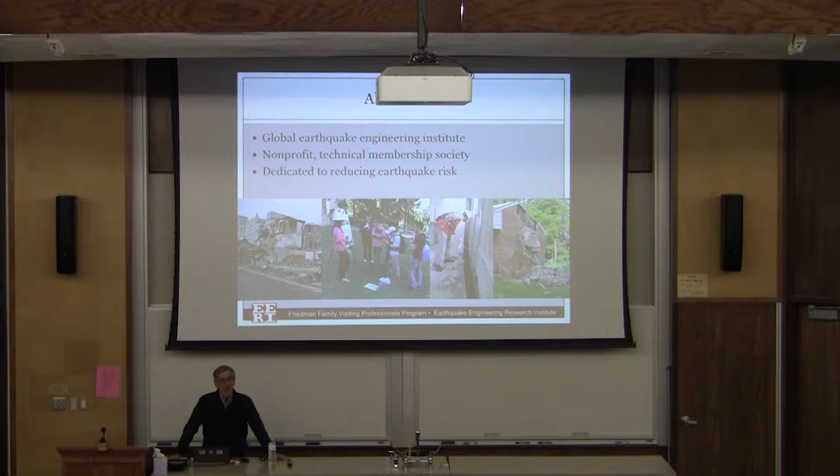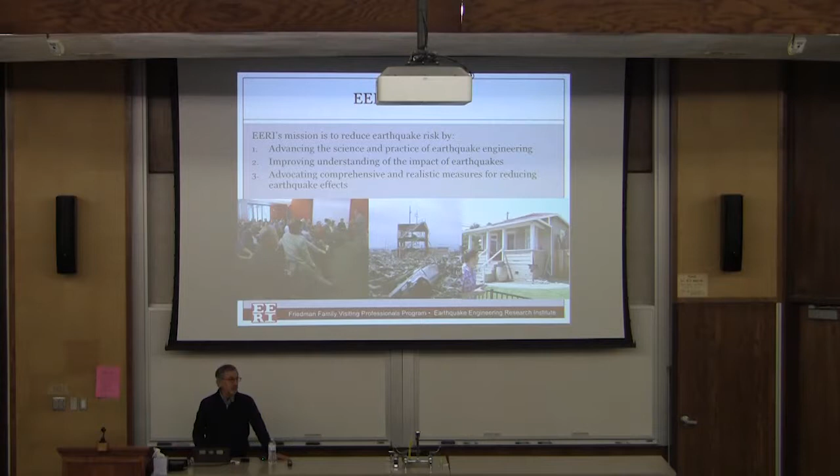I've had a 25-year involvement with EERI. It is a global earthquake engineering institute, a non-profit membership organization. I would highly recommend, even if structural and earthquakes is not your thing, there's something about this organization that is really quite extraordinary in its ability to mix its mission and its vision across interdisciplinary lines, including social science, around disaster, around resilience.

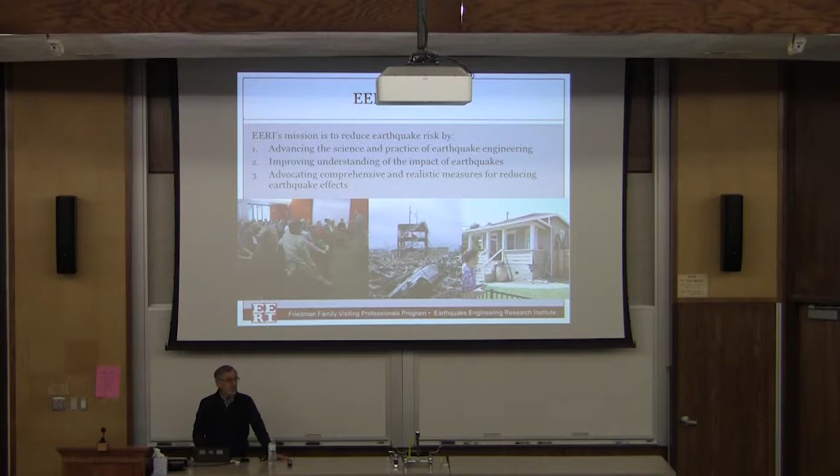So I highly recommend not only being involved in the student chapter, being involved in the regional chapter, and then once you're in practice, become a member. And there are quite a few benefits to being a member and inducements to going from a student member to a practicing member.

We have an extraordinary program in seismic safety in schools. We have a new program, Learning from Earthquakes, which is really our flagship program, and it has been expanded into on-site learning where students and young professionals get to travel to post-earthquake sites. It could be a year or two after an earthquake, but there's quite a bit of learning that can still be done from that travel study program.

So there are regional chapters. I understand you have a very strong Utah chapter. I'm not sure exactly where it's located, but it would be great for you to get involved in that. First year of membership is free, so I highly recommend you get involved in all sorts of professional associations, because there's nothing that gives you that kind of opportunity for leadership development, for exposure, and for the people that you will meet. That's how it charted my course.

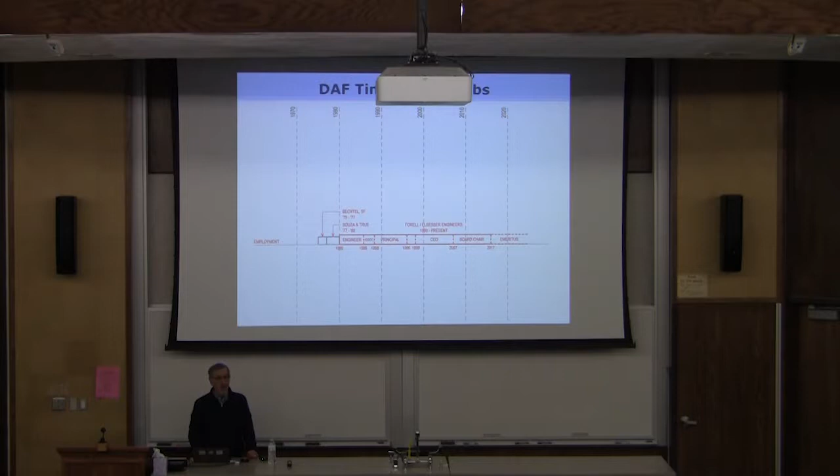So I've added a new slide to a series of slides in my presentation. This is my career timeline. I've had 3 jobs in my entire career: a 2-year job, a 3-year job which I liked much better and which made me decide I really liked consulting engineering, and then a 38-year job that is ongoing with Forell Elsesser Engineers, as my wife put it on my 35th anniversary there, was either you have a lot of stamina or you have no imagination.

So as I said, earthquakes have marked my career, so I added that to the timeline. It is remarkable how some of these earthquakes have either impacted me directly, impacted a project I worked on, or was a major influence in terms of code changes. There's a reason we chase earthquakes around the world, and chasing them with an interdisciplinary team is always the most interesting part of that.

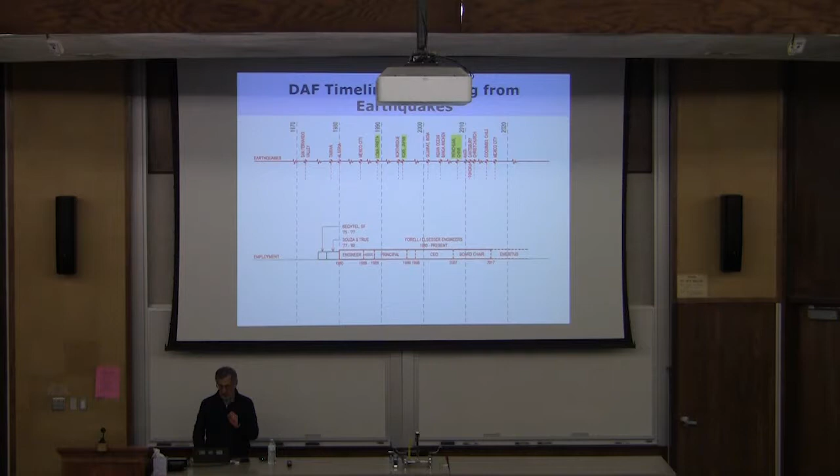1989, there was a little earthquake in San Francisco. And the bane of my existence now is people who say, my building made it through the big earthquake. 1906? No, 1989 - it was a tiny earthquake, and it really did not attest to things at all.

Northridge, 1994, was a really good example of about the code minimum. The code minimum with earthquakes doesn't always work. This was a code-complying building, except for one thing - it did not adhere to the provisions about diaphragm aspect ratio, so that just rolled over because of displacement.

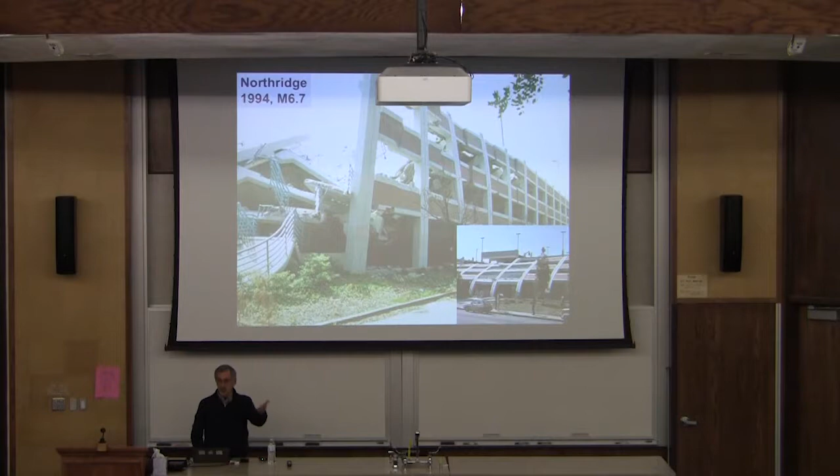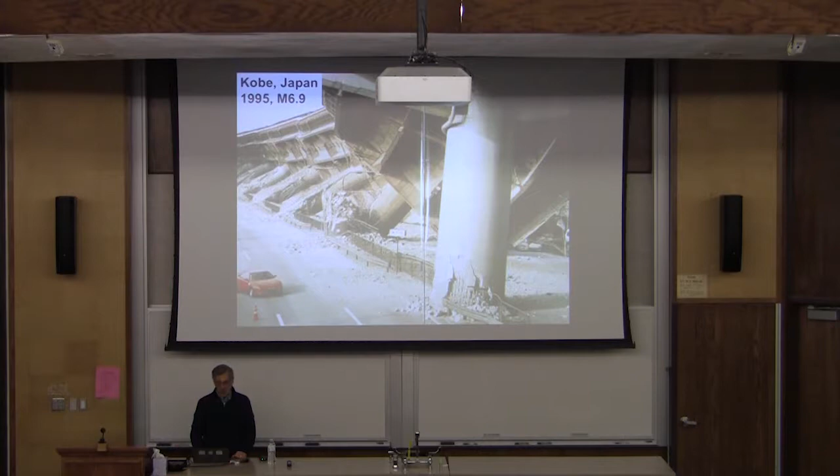1995, I was on the post-earthquake reconnaissance trip to Kobe, Japan. For me, that was a huge eye-opener, because what it taught me—this was an Embarcadero type freeway viaduct structure—is the brute force approach to seismic design. The larger you make it, the heavier it is, the more seismic force it will attract.

Banda Aceh opened our eyes about tsunamis. Wenchuan, China, this was very important in my career because I met someone influential in my life, Elizabeth Hausler, who started a nonprofit called Build Change that does seismically safe housing in the developing world. So now at the end of my career, I can devote time to being on the board of organizations like this.

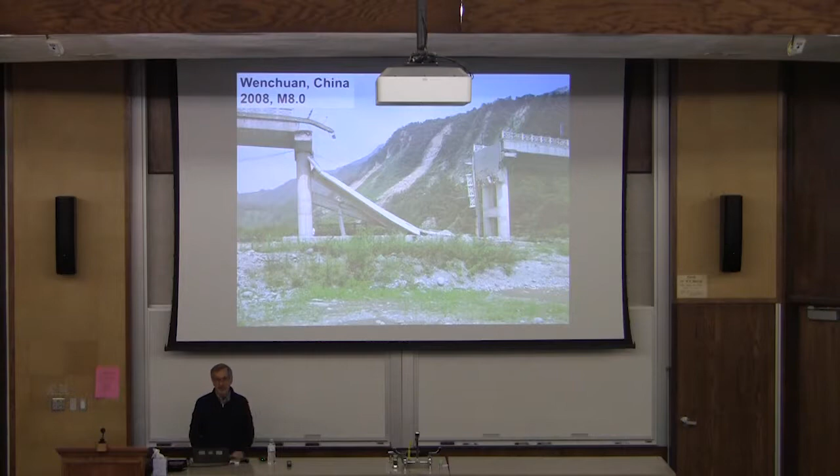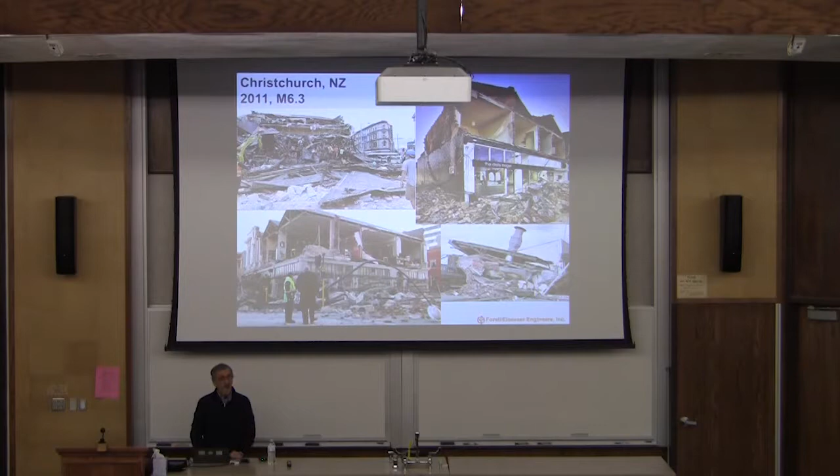Haiti just broke my heart. Being on that post-earthquake reconnaissance team, that country was destroyed by an earthquake and barely is recovering now. Christchurch was a modern earthquake with great building codes, great construction, and that central business district today is still destroyed by that earthquake. Tohoku, Japan, another tsunami.

Heard about the power plant, but what was important about this earthquake is not only do we measure Richter magnitude, the duration of ground motion means a lot in terms of a building's response. The Tohoku, Japan earthquake lasted 2.5 minutes of strong ground motion. So it was really interesting.

So, structural engineering—here's my favorite definition of structural engineering: Structural engineering is the art of molding materials we do not entirely understand into shapes we cannot precisely analyze, so as to withstand forces we cannot really assess, in such a way that the community at large has no reason to suspect the extent of our ignorance.

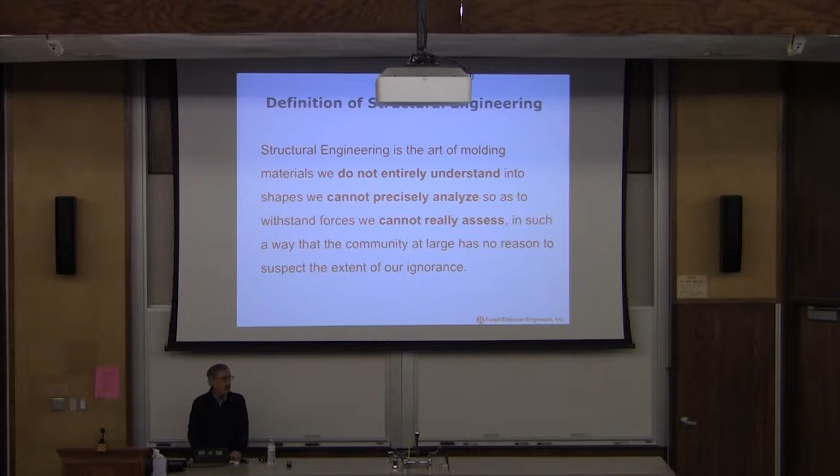Unfortunately, it's entirely true. There's a lot we can do, but at some point you have to use a lot of judgment in what you're doing. So I'm going to pontificate for a few minutes about what I've learned and some lessons learned.

The building code—we change the building code as we learn things over time. The building code, when I started practicing with respect to earthquake, was about 11 pages. Today, it's 3/4 of an inch. I'm not sure it's all that much better. It certainly is more detailed, but we've learned a lot of things from chasing earthquakes around the world.

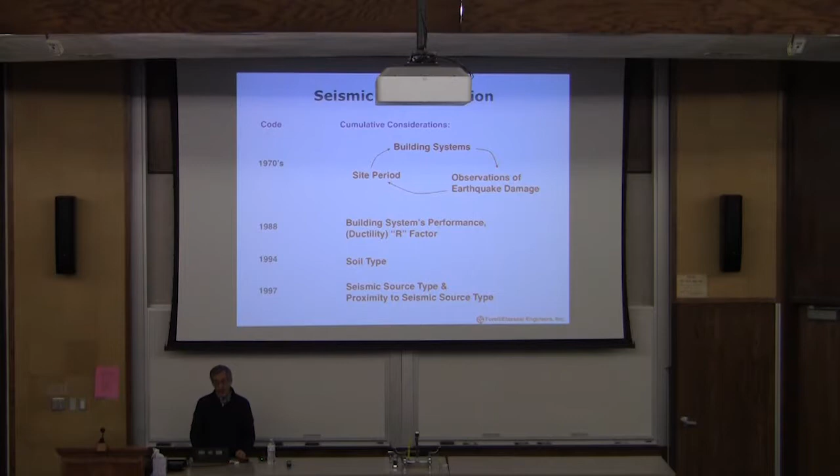But the code is still a life safety code. What does that mean? It means that you design the building to safely get out. It says nothing about your ability to get back in. In fact, it can be a complete economic loss. That is the basis of our building code. And I've come to believe that that is really not sufficient when we know we can do better.

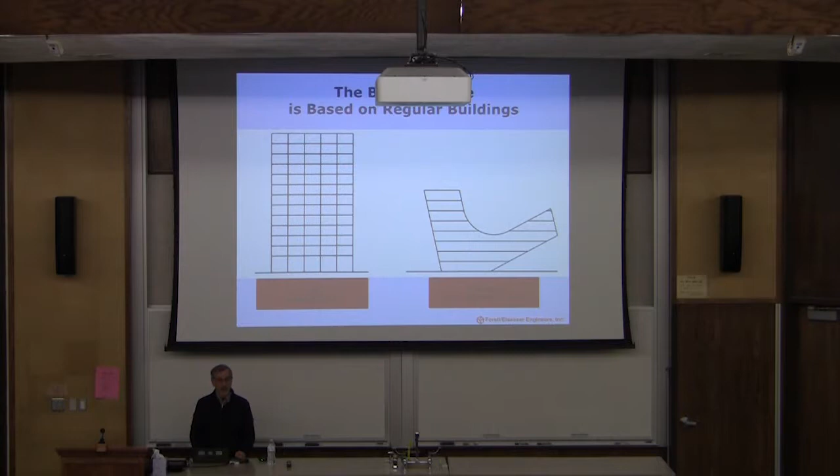The codes are based upon regular buildings, not really based for irregular buildings like the one shown on the right. Again, the building code is based upon life safety.

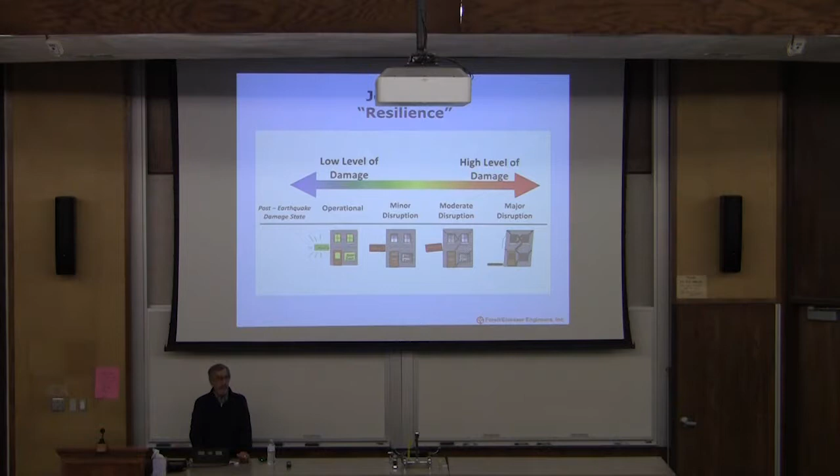A colleague of mine made this diagram of Joe's bar, because everyone can relate to a bar. On the right side of the slide are buildings that will be highly damaged in an earthquake—those are actually the code compliant buildings. What I'm trying to do these days is advocate for lower levels of damage, operational buildings, buildings that can be repaired in short time with a short amount of repair. That's what I call seismically sustainable buildings. And there is a whole movement afoot to do more in the way of seismic resilience.

A large part of what you do in practice is the documentation. You're putting together a set of drawings, plans, specifications, details. When I started, I used to do hand-done drawings in pencil. Today, it's all done by AutoCAD. I don't even know how to draw a straight line in AutoCAD, but everyone today does seem to know how to do that.

But the importance of documents is critical because a contractor is going to try and pick it apart. They're going to try and find the mistakes, and they're going to hammer the client because of that, and then the client's not so happy with you. So quality control of your documents is a very important thing.

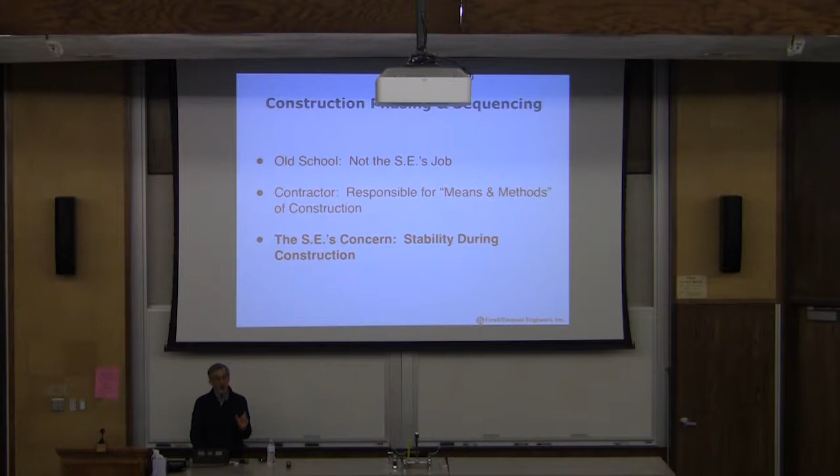I was taught early on that during the course of construction, the design engineer stays out—that's what the contractors are responsible for, called means and methods of construction. But so many of my early projects were retrofit projects where I cared a lot, because we were actually destabilizing the building until we were able to make it stronger. So a lot of our work does tend to pay attention to the stability during construction.

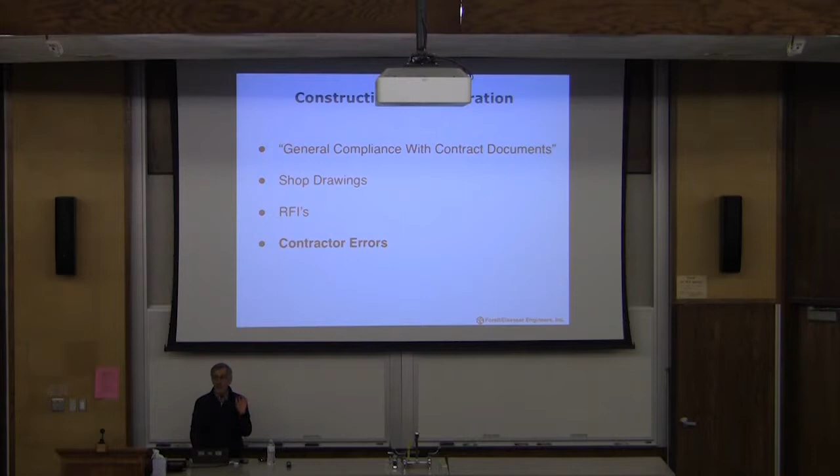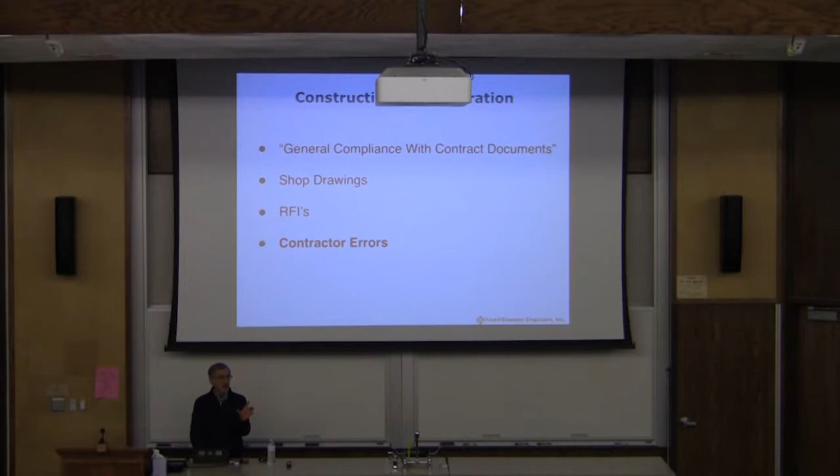Construction administration is an important part. After you design the building, put the drawing together the best you possibly can, you turn it over to a contractor, you review shop drawings, which is your chance to look at the vendor drawings to make sure it's being interpreted well. But contractors still make mistakes. Like, you think those two joists were supposed to align? You think that column was supposed to be plumb?

You think this followed the typical detail of spacing and penetrations through the slab? No, it's kind of just caused a shear zipper through that.

So these kinds of things are dramatic, but this is why an engineer goes to the field periodically, not to provide special inspection, but to make sure the construction is happening in the way it was designed.

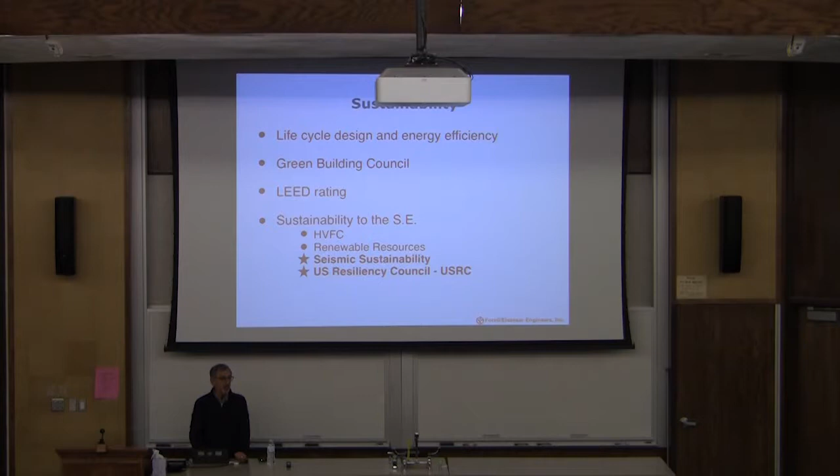Sustainability has become a new buzzword, but they kind of left out seismic sustainability. There is the U.S. Resiliency Council, a rating system for seismic performance, kind of like a LEED rating system. You've probably heard of that. This is trying to draw the public's attention to the safety of the buildings we live in, we work in, and pray in.

Communication is a really important part of the practice, written and oral. In fact, most engineers get the bad rap and stereotype that they don't know how to write, and to some degree it's true. But it is possible to write well and communicate well. What's hard for an engineer is communicating technical stuff to a lay audience, and you have to appreciate that, and sometimes intentionally dumb it down.

We've actually found ways of making movies, of diagramming things to help illustrate what it is we're trying to advance. So I'm going to talk to you about a couple of my projects.

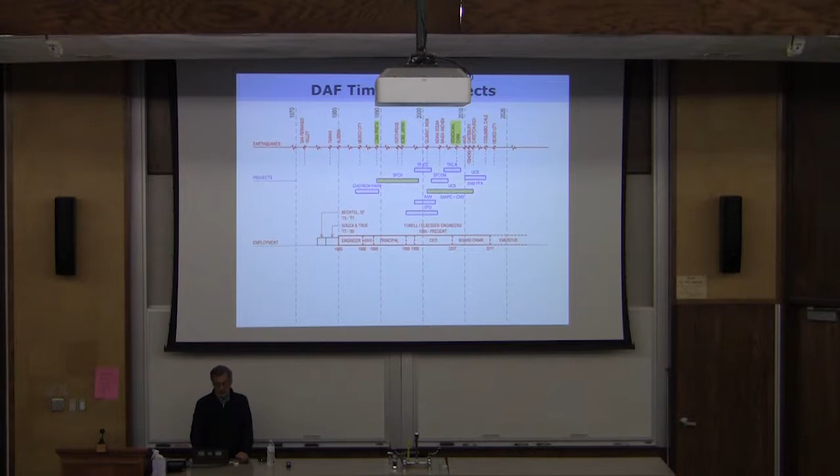On my timeline, I superimposed some of my projects, and the two highlighted are San Francisco City Hall and Memorial Stadium at University of California, Berkeley. You'll notice the decade-long time span of those projects. That's not typical, there were reasons behind it. They were unusual, one-of-a-kind projects, and so there was a lot of scrutiny.

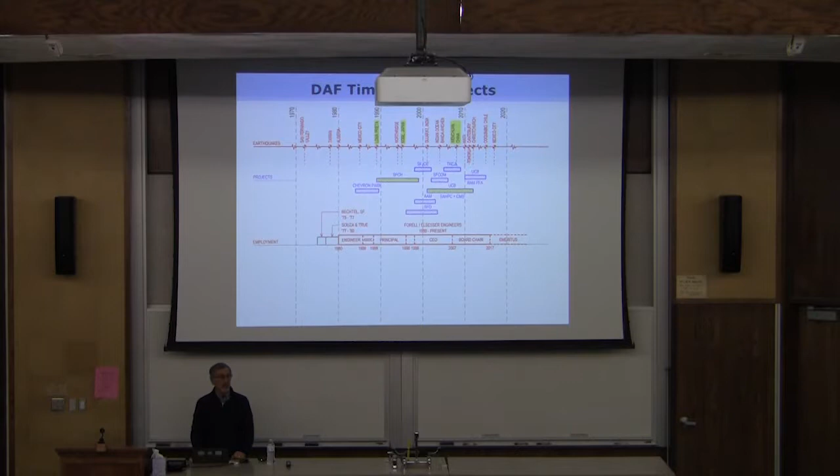On the Memorial Stadium project, there were 2 years of litigation to try and stop the project. I decided after spending 2 years with attorneys that I like architects much more than attorneys.

So how many of you have ever heard of base isolation? A few, that's good, because I thought I'd do a little primer on what base isolation is.

There are really 2 basic kinds of base isolators. There's an elastomeric one, the top 2, which are layers of rubber, high damping rubber, and steel, vulcanized together like a birthday cake, vertically very stiff and laterally flexible. The one on the right is another type of elastomeric bearing, but it has a center core plug of lead that adds to the damping characteristics.

A third kind is called friction pendulum. Today we use all of these almost interchangeably. The vendors for them, when we first started, were only proprietary vendors of each. Now it has opened up to be a much more competitive marketplace.

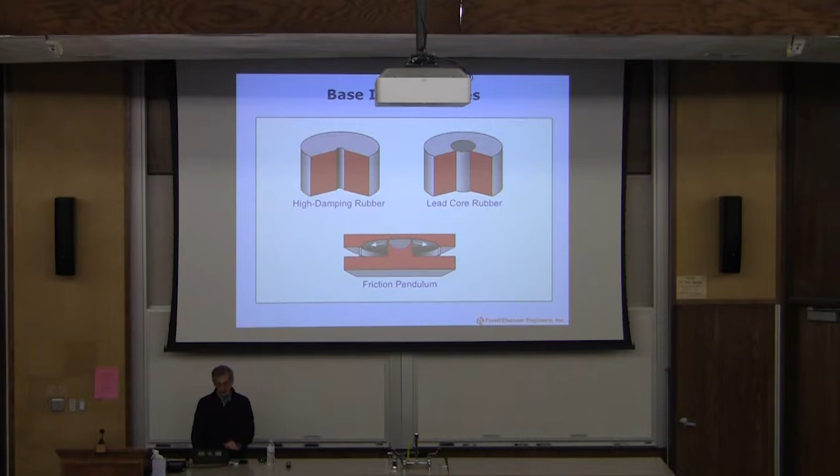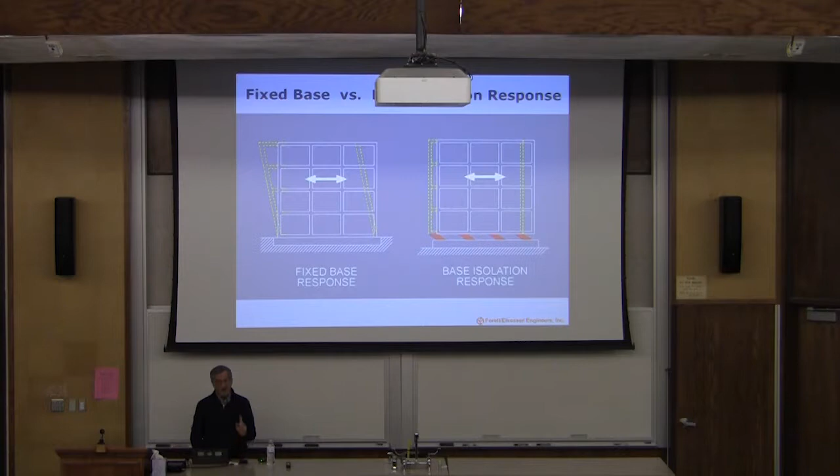But in a base isolated building, we soften the period of the building to somewhere between 2 seconds and 3 seconds.

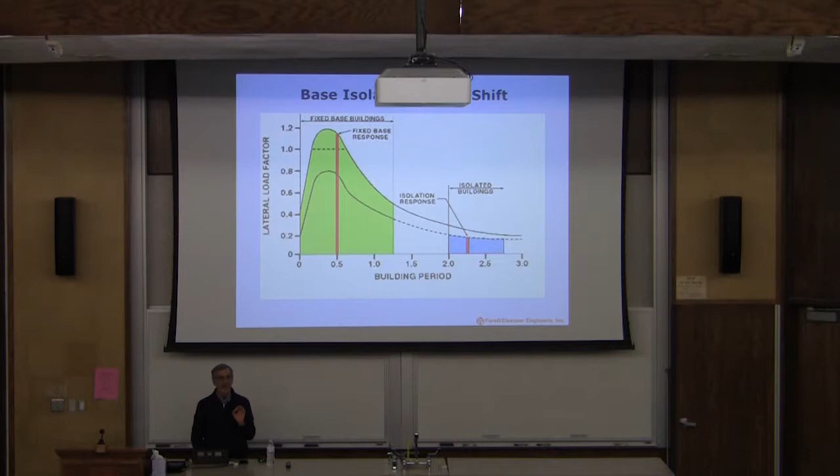And if you read back over to the acceleration, it's like 0.2 G. So we get almost a 500% reduction in the lateral force that we're designing for.

During the course of my career, we've been involved in all of these base isolation projects, most of them retrofits at the beginning. It's a lot easier to do for a new building. The very first building that we did was the City and County Building in Salt Lake City. They were the first ones who said, yes, we'll try this. And more recently we also did the Utah State Capitol building, which is also base isolated.

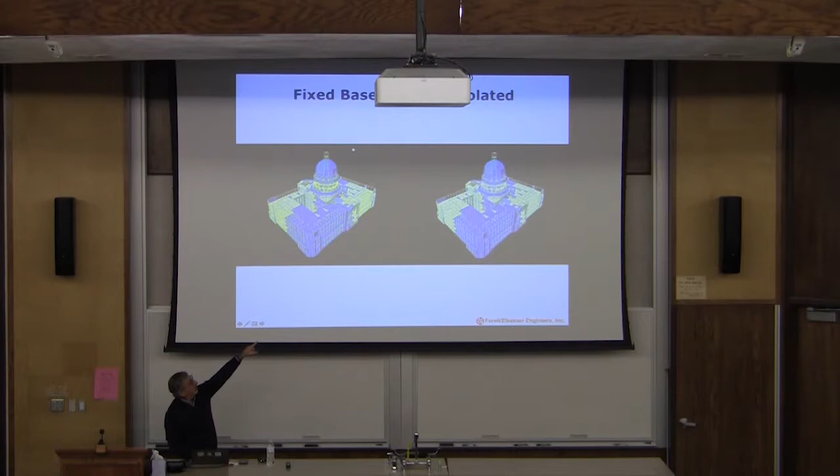Now, to demonstrate to the clients—I hope this works. So what you're seeing on the left is the fixed base building, on the right is the base isolated building. This is a real-time history earthquake response. Look how much the dome is moving on the left, how it's distorting. But under the base isolation, you can see those spring constants mimicking the isolators, and you can see how little the dome is moving.

Do you know, has this been magnified at all? Absolutely, yeah, for your viewing pleasure. Yes, it has, but it is symbolic of the stresses that the building is undergoing. It was long after we were under construction that we had the technology and the ability to show this to the client, but this kind of animation explains the value of this in one shot.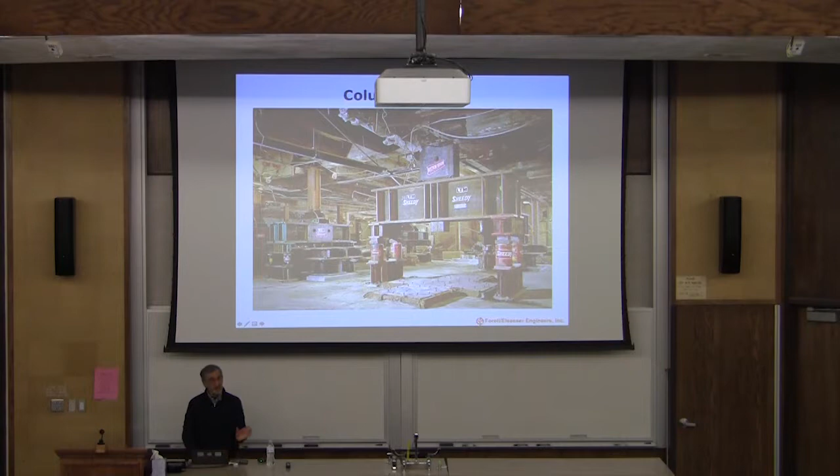And then on the left side you can see where the isolator has been slid in, and there's a steel cruciform on top that's going to be part of the future floor. In some cases, because of column weight and load, we had two isolators underneath, and you can see there are some plates around that. We locked the isolators down because until we installed all 468 isolators, it wasn't ready to be released.

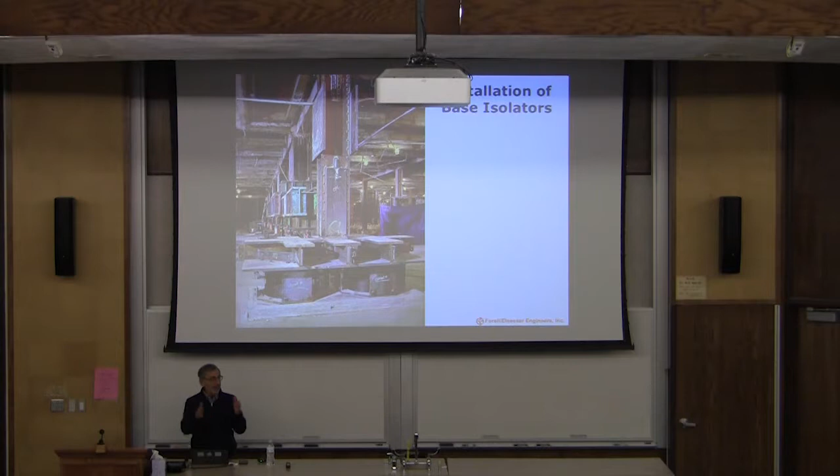In fact, we had to do the rest of the stiffening through that. There were 4 or 5 column towers that support the dome, and this took an extraordinary bit of bracing to support and do the load transfer there. And then this is a last shot of the new steel floor where you can see the seismic isolation plane below, where the isolators are residing. And then we put steel deck and concrete on top, so we had a nice stiff diaphragm to load all of the isolators more uniformly.

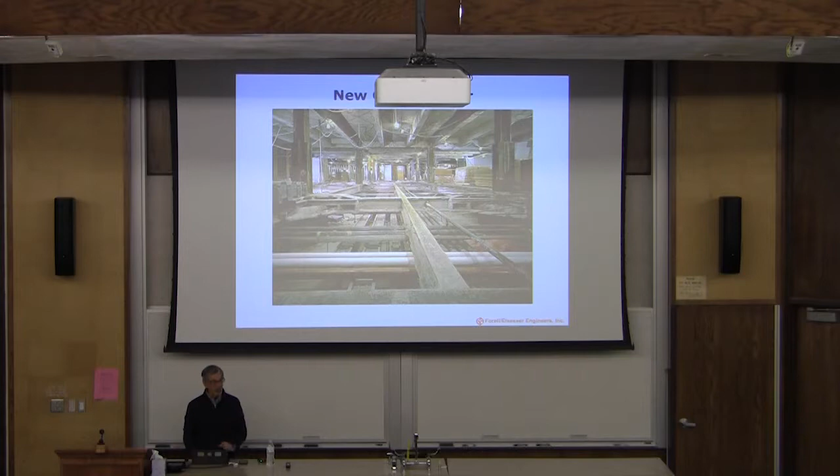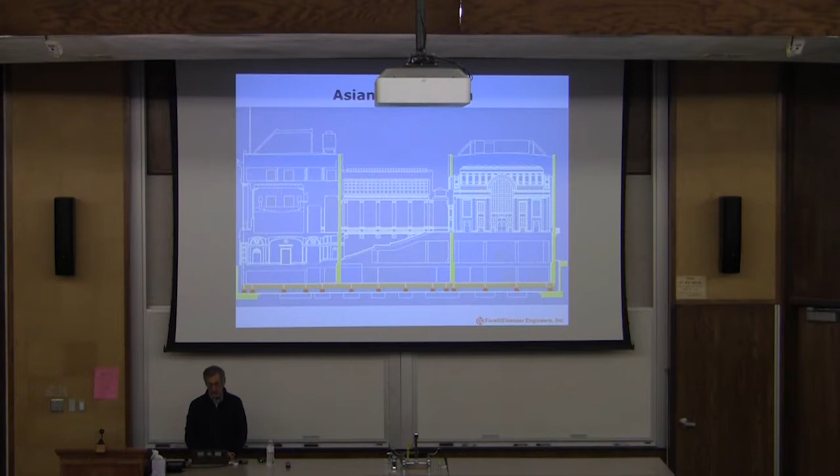As we were finishing up the construction of San Francisco City Hall, we competed for the Asian Art Museum project. It was designed by the same architect and the same engineer, same construction techniques. This was the old city library being converted into a museum, an Asian art museum, and it was essentially the same thing—we were creating a new isolation plane, stiffening parts of the superstructure. But in competing for the job, it was a historic building, and we kept saying we can do the same thing for this building, we can protect it. And the owner and the architect both turned to us and said, that's very nice.

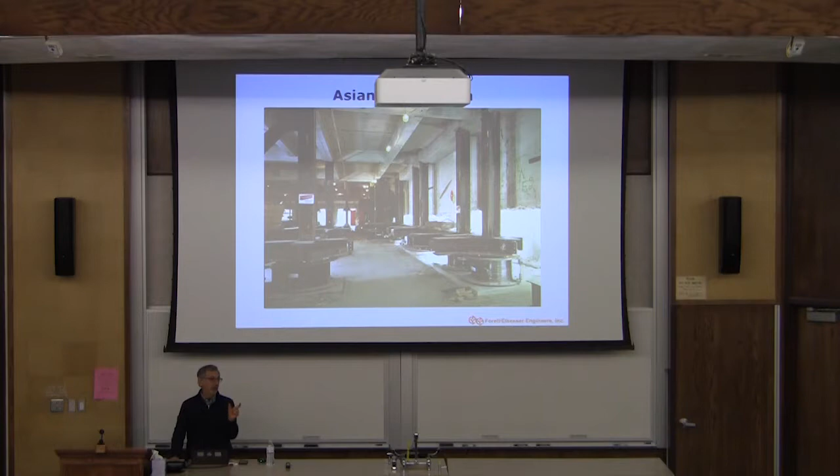We don't care about the building, we care about our collection. And the only way of preserving the collection and protecting it in an earthquake was to base isolate the building. So it was actually my first lesson on how base isolation and content and non-structural elements are about as important in earthquake engineering as the primary structure.

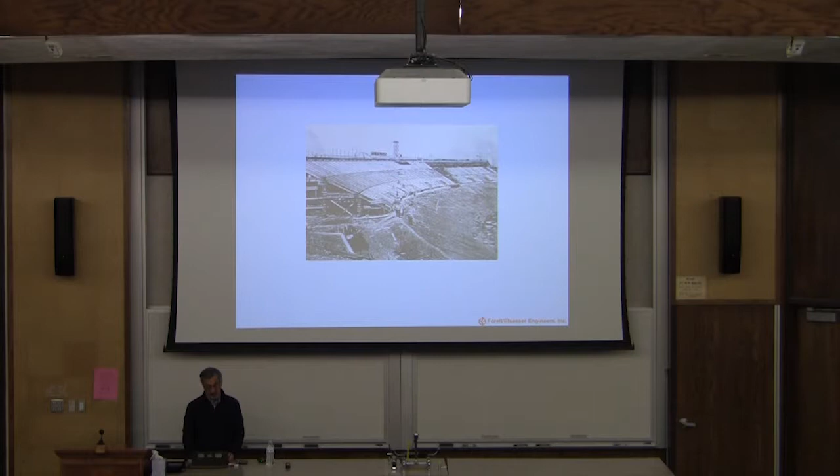It was carved out of a hillside, so one half of the stadium is just a slab on grade, so we had no concerns about that. I love seeing the mules doing the excavating in this. The stadium was built in 9 months for the cost of $1 million back in 1922. And I said that we spent 10 years in design and construction. This shows some of the scaffolding and shoring for the new West Bowl.

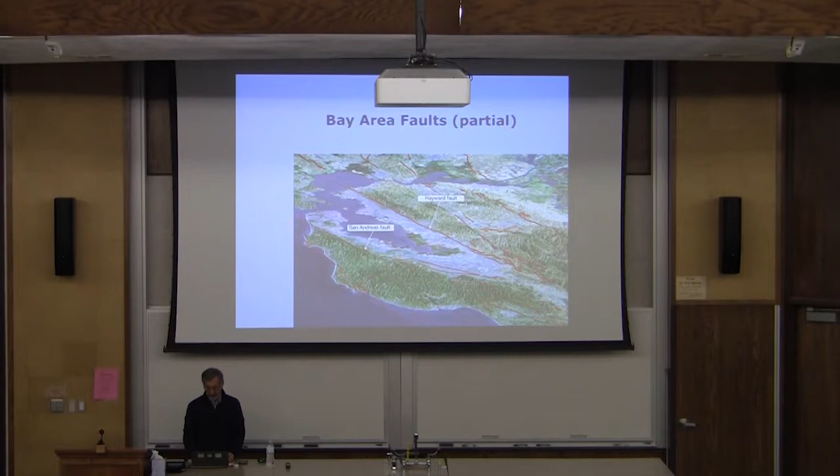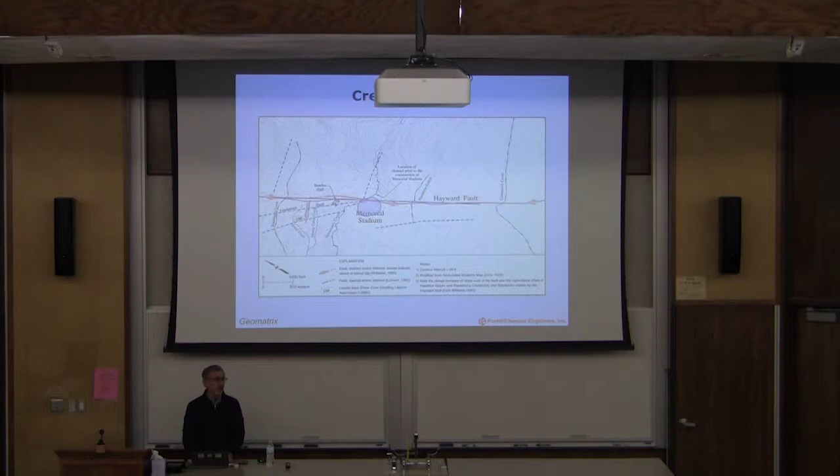As you probably know, the Bay Area is ringed by earthquake faults. There's a line, an arrow that points to the Hayward Fault. That arrow is pointing exactly to California Memorial Stadium. The faults are all right lateral faults, meaning they're moving more horizontally than they are vertically. But we knew from the beginning that this building sat right over the top of the fault.

Here's one for the geotechnical engineers in the room. This really explains, and in light green you can see this shutter ridge that is geologically, over time, what has created this. You also see Strawberry Creek that runs, and that's also an indication of how much creep has happened in the fault. The creep in the stadium was pretty interesting to us to track what had happened to the stadium over time.

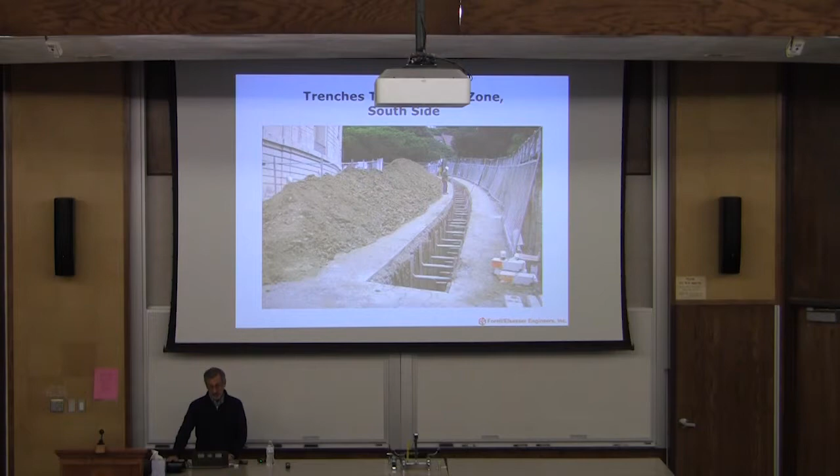So we brought in crews and trenched to look for the fault. This was really exciting for the geotechnical engineers. I did not want to get down in that, but they went down and they mapped it, and they could very clearly find where the fault was. What was important through this process was understanding where the fault was and where it was not. So we knew it's there. There were many times, as a Cal football fan, I was hoping that the fault would just open up and the team would fall in.

But then later on I decided I had this challenge. This had never been done before. No one had ever tried to do this. So we started to study: what did we know about fault rupture behavior? What we had been given is this fault will displace as much as 6 feet horizontally, 1 to 2 feet vertically.

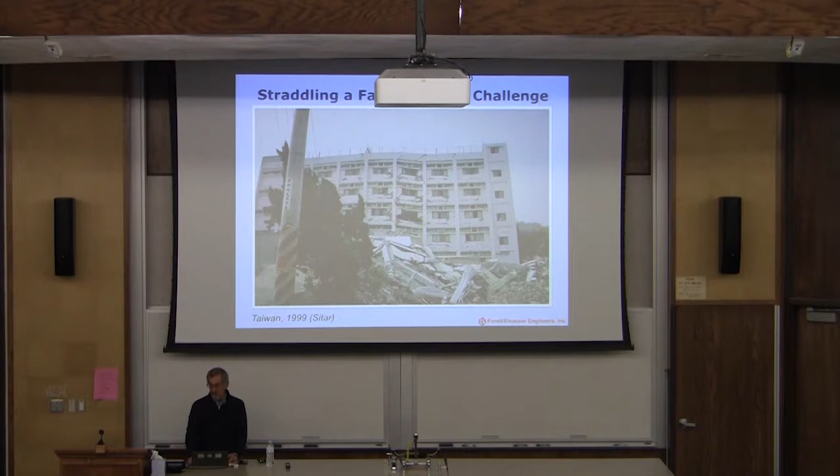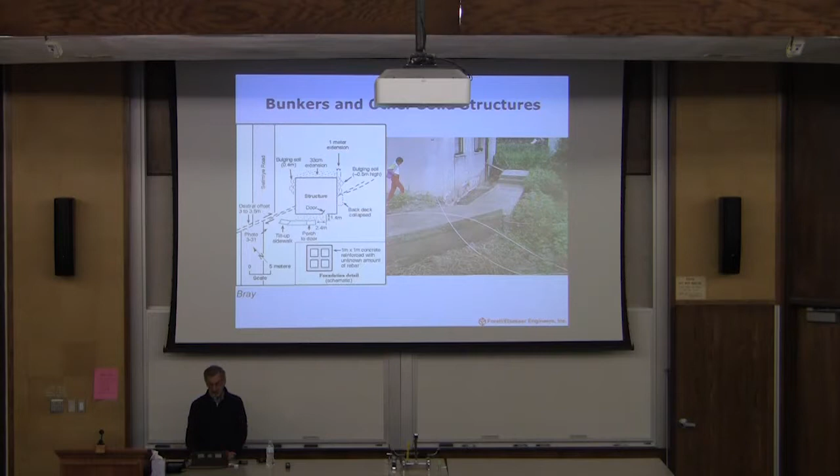Imagine the roots that go down, and that's what engages the fault rupture, gets attracted into it by trying to strengthen the foundation. Here was a case of a little bunker-like building that basically was so rigid and was on a little mat footing that all that happened when the rupture and displacement occurred is it rotated, tilted a little bit. We decided that was a good life safety solution.

So what we ended up with was this. In diagrammatic form, we were creating this fault rupture block, seismically separated, and seismically separated not just through the superstructure, but all the way through the foundation. That's usually not done.

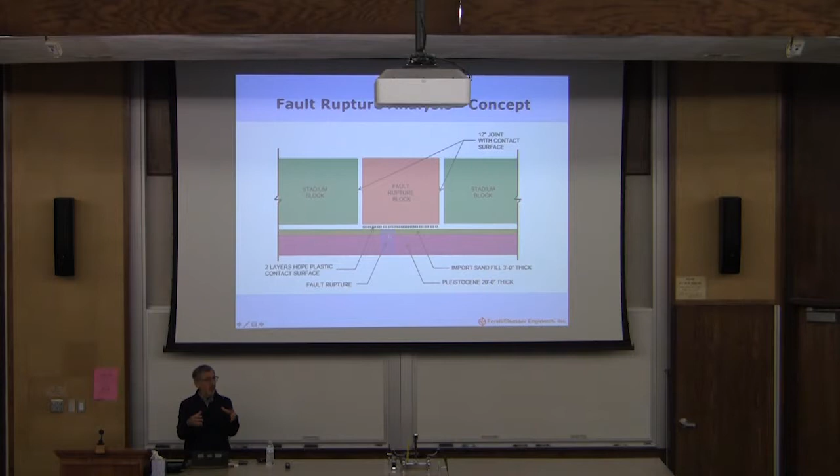The block would be located on a very rigid, level mat foundation, so that in the event of a rupturing earthquake in this zone right here, all that will happen is that it will rotate or displace. So we ended up creating these two fault rupture blocks, one on the north, one on the south.

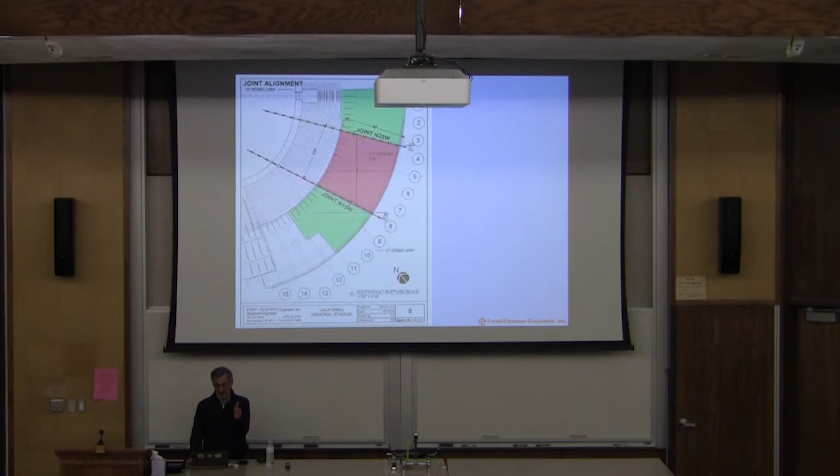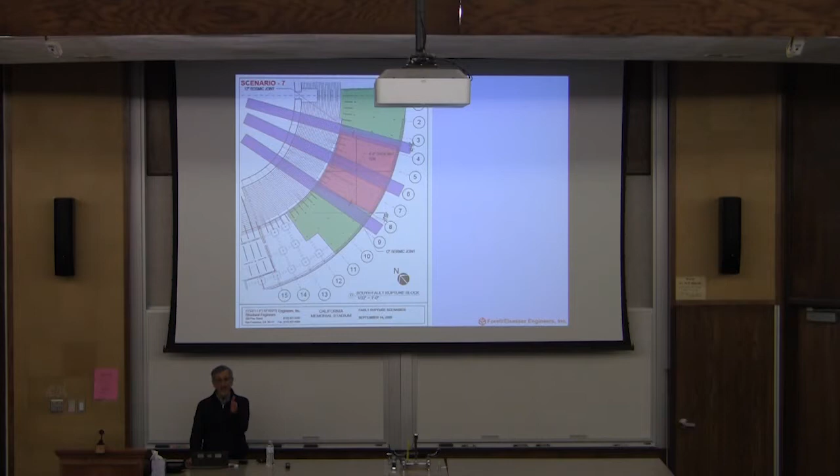Geotechnical engineers and seismologists gave us not only the probability of locations, but the angle of where they thought the rupture would occur. We went through countless parametric studies figuring out where it could occur, whether there could be multiple or sympathetic ruptures, but we ended up putting one joint at the most likely location and angle of the fault rupture. We did an ABAQUS finite element analysis of the building.

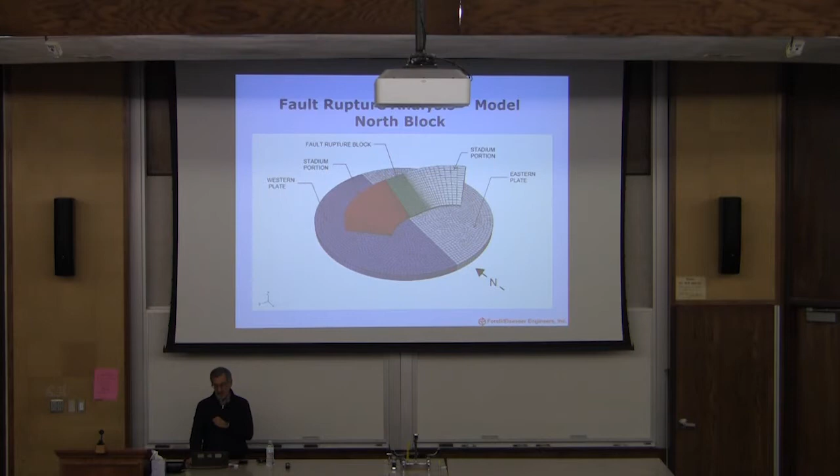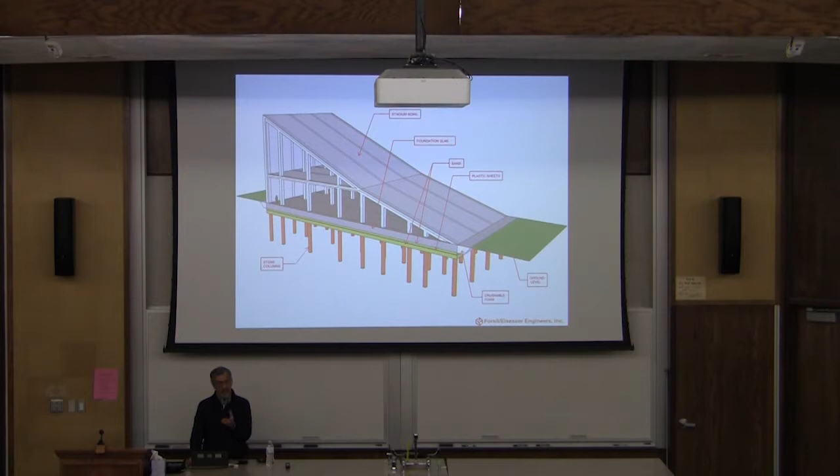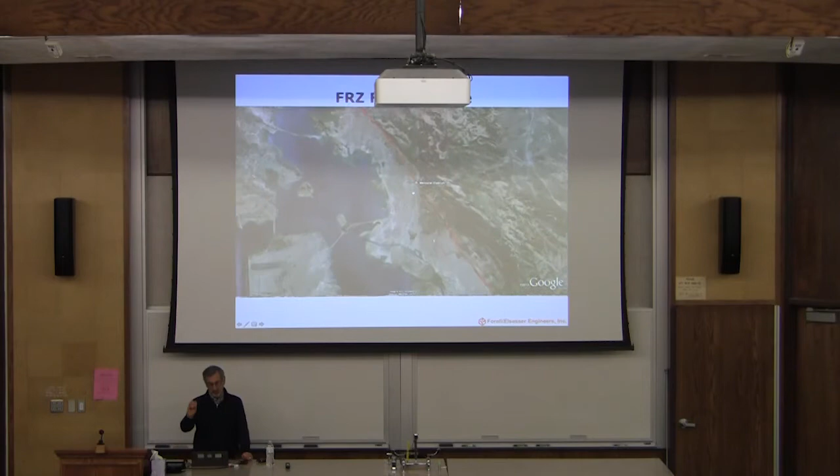So I have a little animation here that is a little slow, but it will, the third, I like this Google Earth kind of focusing in, going through 3 times. We used this with the client to explain to them what we were doing.

You won't see it on this one, we kind of animated a rupture through this, but you'll see a couple of other views. This is beginning to get better. You'll see the fault rupturing on the floor of the stadium, you'll see the block moving. This last animation is the best.

But you see the rupture, the vertical rupture, horizontal rupture. You see what we, again, accentuated, but still it was important to the client to see that.

What was interesting is everyone expected us to do some fancy sort of base isolation, and yet we did really, really basic stuff here. What we didn't use basic stuff for was the west wall. We spent all of our time on the fault rupture blocks because we thought we know how to seismically strengthen a concrete structure.

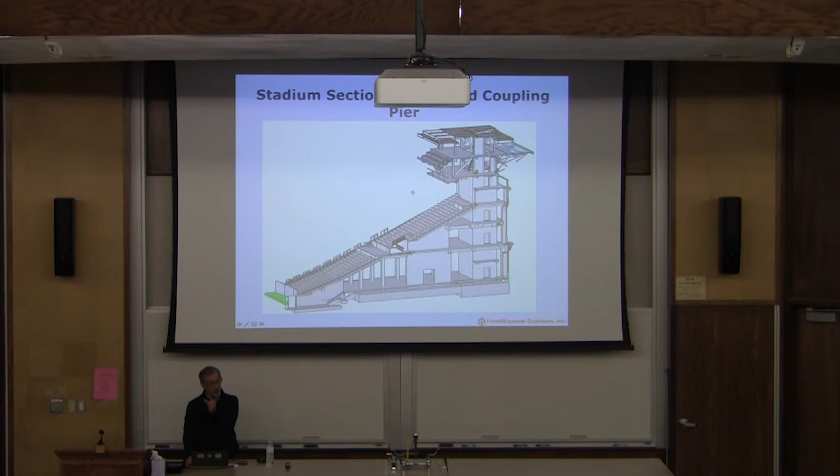We were so wrong. So this is a section through the west wall of the stadium with a new press box. You see one segment, but you see this triangulated structure, you see a concrete core on the right side, and this press box on top.

What we found was when we first started saying we'll add some shear walls, and we're using the concrete cores to support the press box, that triangulated—the raker beams of the stadium were creating a strut, and it kept failing on us, it kept buckling on us.

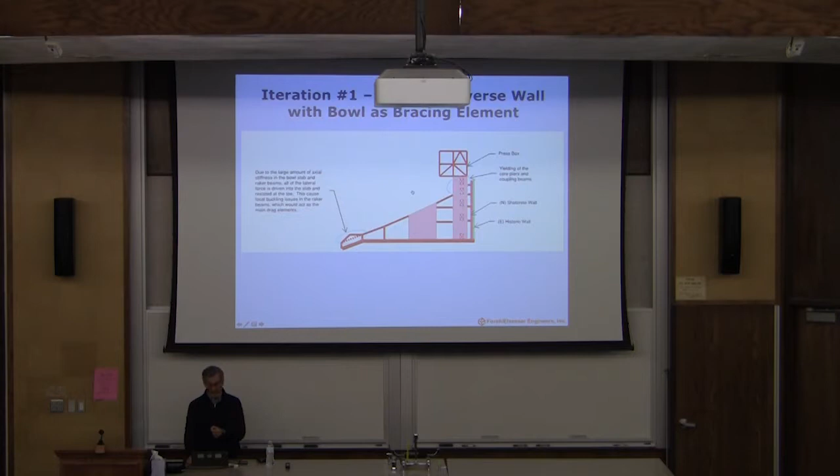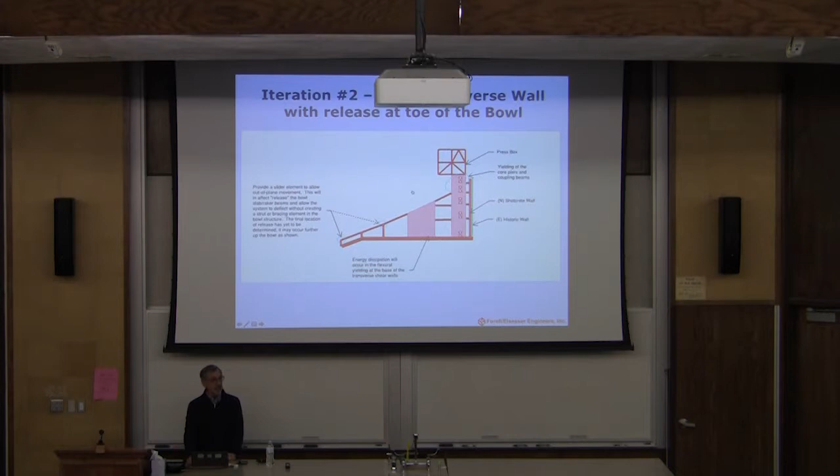So we said, okay, what we need to do is unbuckle it. We'll just put a slider at the base of the raker. But we were getting so much yielding at the top of the core, so we thought that's okay, we'll put some energy dissipation in the system.

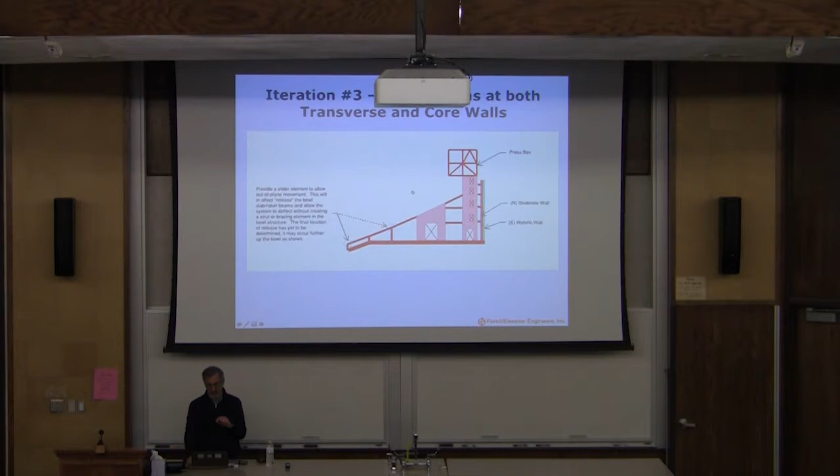It's the first time I asked an architect to put an opening in a shear wall. Usually it's the other way around. And even then, we still found that we were getting a lot of yielding.

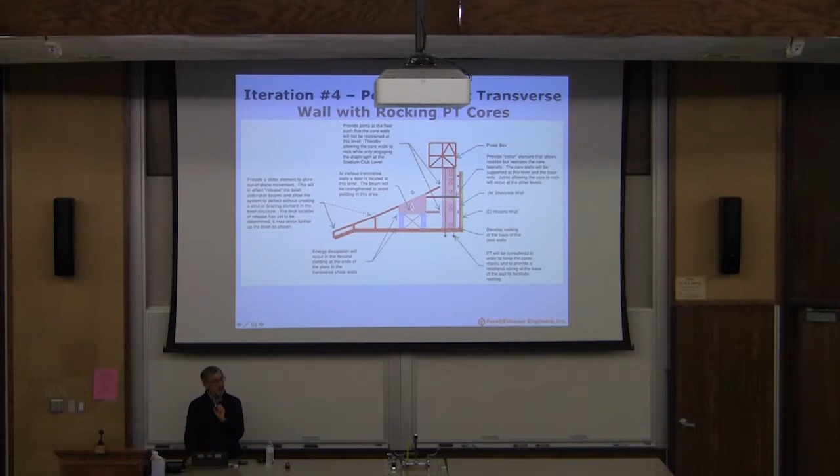So we finally said, why are we fighting it? Let's cut the core and the press box free and have them be seismically independent. We created a collar around it, a space, and that was pretty much the solution, but then we threw in hydraulic dampers around each of them to control the differential motion between them.

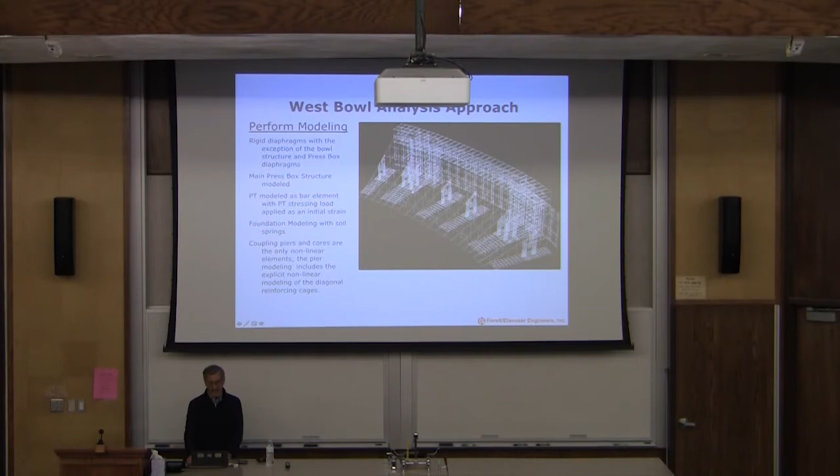We had a great time doing the analysis on this. We also did a nonlinear finite element analysis. And then this is another little animation—you can just see the core and the press box moving. I mean, actually the bowl is moving too, but just not as much.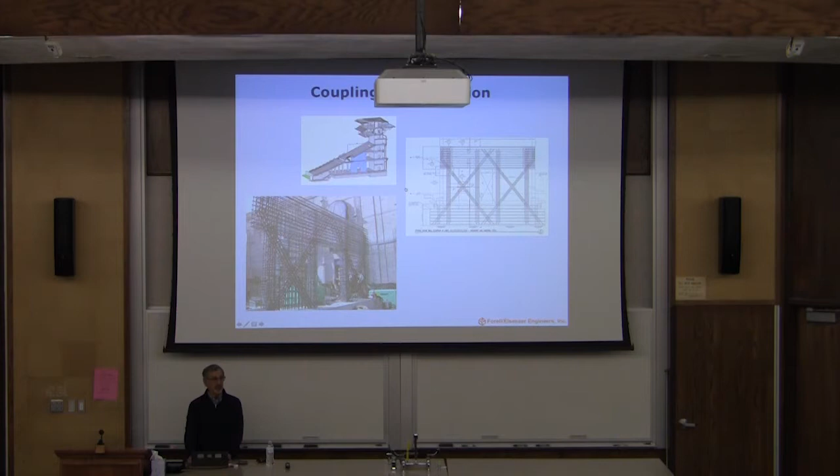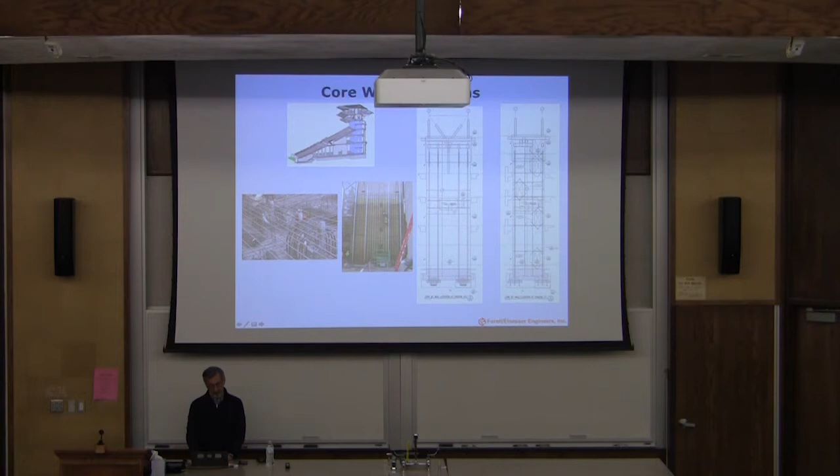In the concrete pours, we use vertical post-tensioning. You'll see in this photo on the left side, in the light gray is the post-tensioning conduit, and then these are all number 18 rebar bars that are preventing the thrust of that. For scale, here's a construction person.

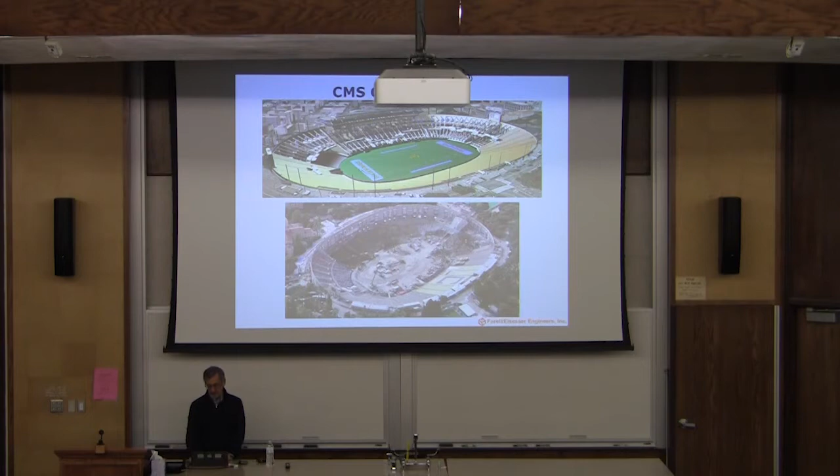What is this? This shows 23 concrete trucks on a large mat foundation a day. What is important about this is that every single piece of material and equipment had to come through that North Memorial Arch. This again was something we had to think about in the course of construction.

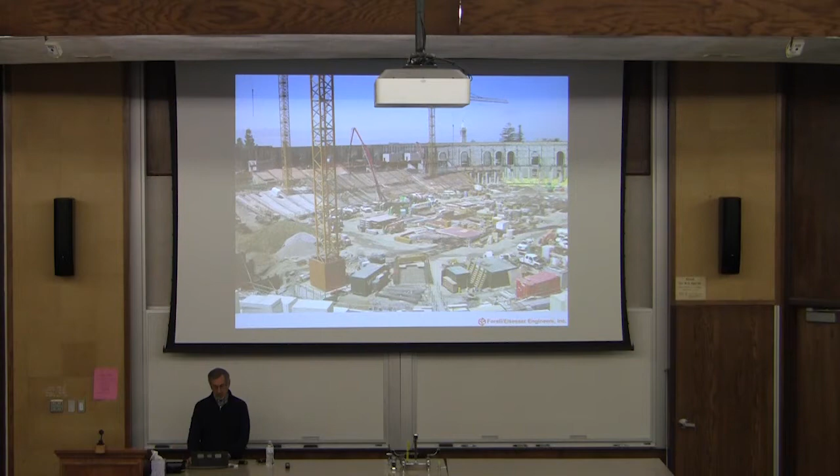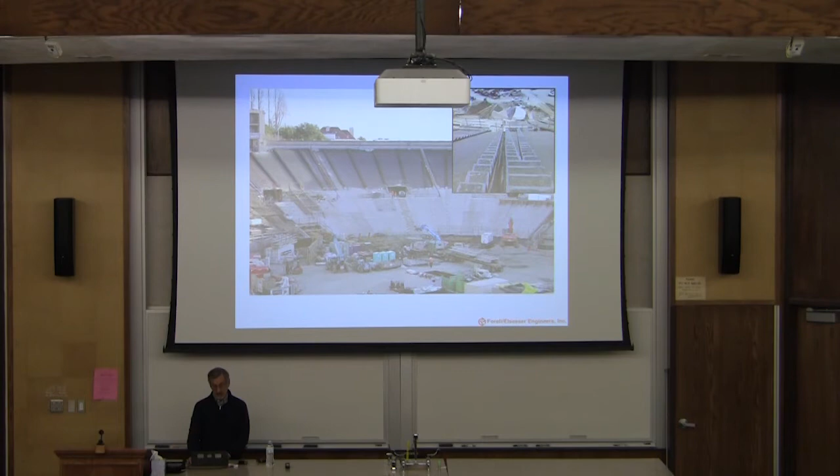This is, you see the west bowl being formed. You can see the concrete pours beginning to come up above. That joint in the upper right-hand corner is the joint between the fault rupture blocks.

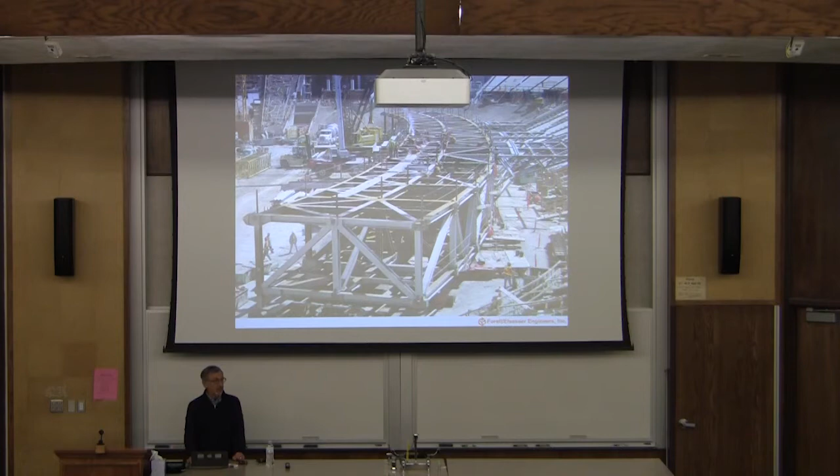So this is the press box. This was fabricated in a shop, assembled in a shop, disassembled in the shop, brought on trucks into the stadium, reassembled on the floor of the stadium. Then they brought in that little yellow crane to put together the big crane that came in on 73 flatbed trucks.

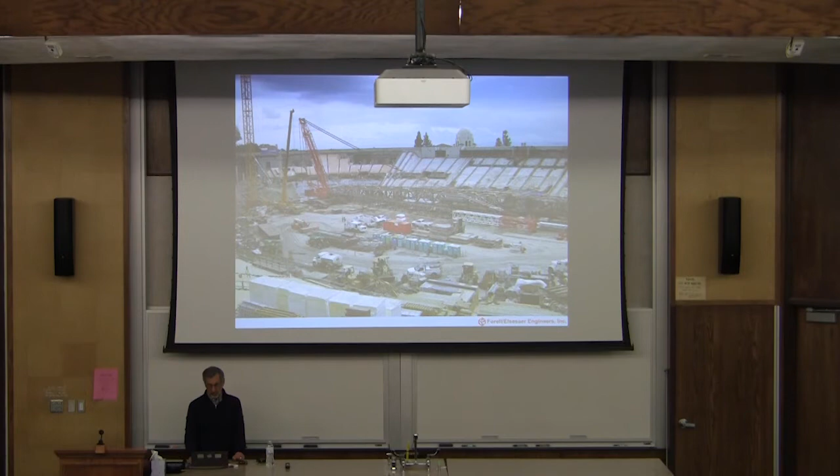I don't think I have a picture. The day they put all the ballast on to counteract the picking weight of it, it blew out all of the tires because they had been stored in the Nevada desert for 3 years. So they FedExed something like 24 tires. I'm not sure I realized the size of the FedEx envelope needed for that. But then they disassembled part of it and picked up the press box in 5 pieces.

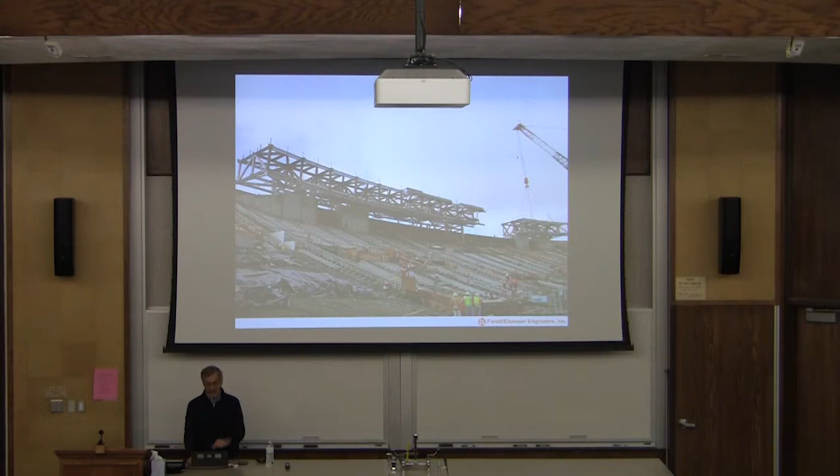The way we designed the press box had a lot to do with the way it was all being delivered. Otherwise, because we designed it to be radial transverse truss elements rather than designing it another way, it took more erection time, but it was absolutely worth it.

These are a picture of the dampers, the finished stadium. I think we've won 3 games since the completion of it.

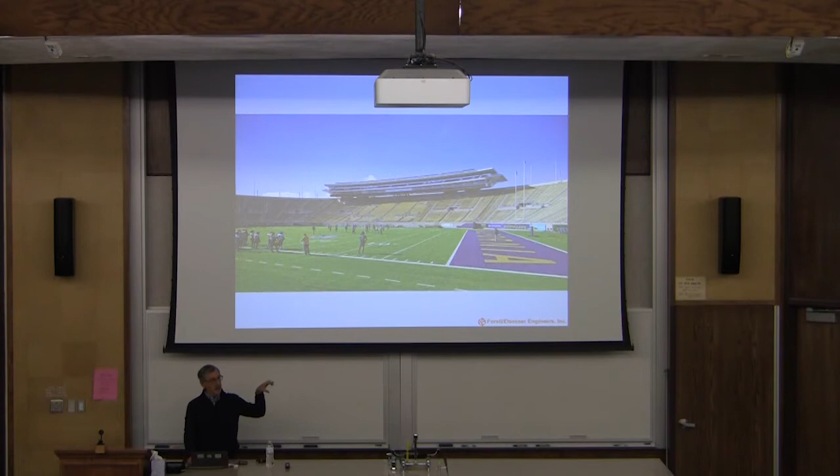It was interesting that the architectural concept for the press box was to not compete with the historic fabric. They wanted it to be this floating structure over the top, and in a way it works. You can see kind of the light below it.

And my last slide is my last superimposed timeline. It shows my involvement in the Structural Engineers Association, my professional activities, EERI, all of these things were really important to my career. And then at the very bottom, I'm at the point in my career where I get to do exactly what I want.

And what I want to do is to be an advocate for safety. I'm very involved with Build Change that's doing seismically safe housing in the developing world. I'm not sure without EERI and without the twists and turns my career took, I could say this, but at the end of my career, I've loved every minute of my profession. And I highly recommend this profession. It really is very exciting. Keep your eyes and ears open, and I think you'll have a great time.

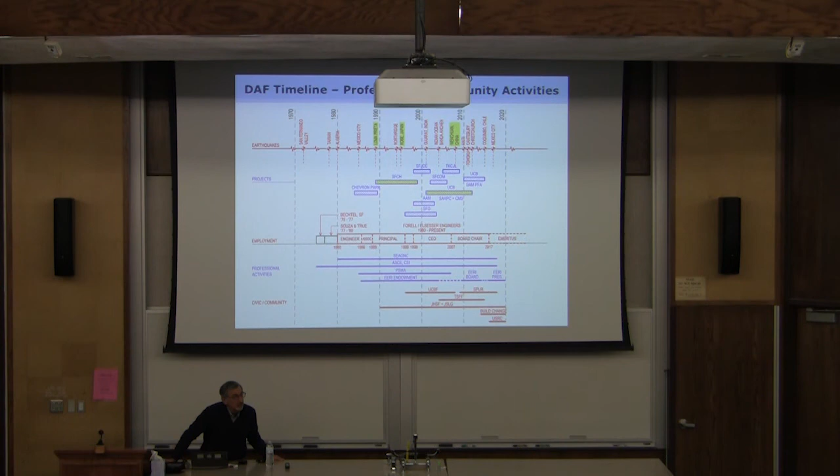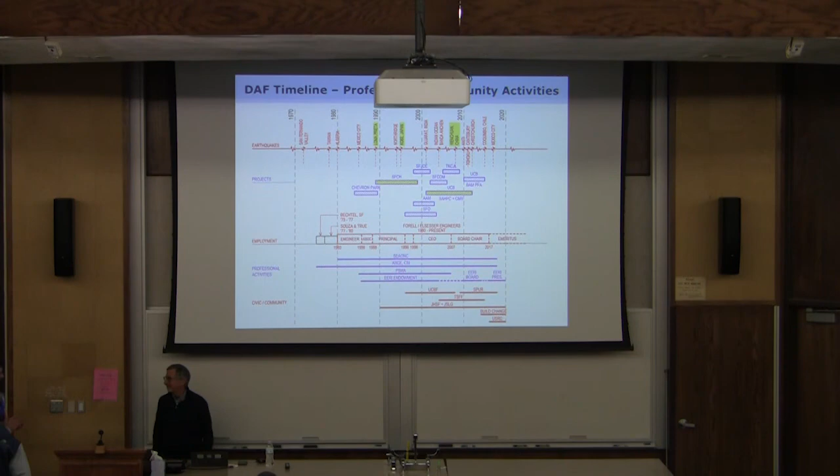I just had the most—